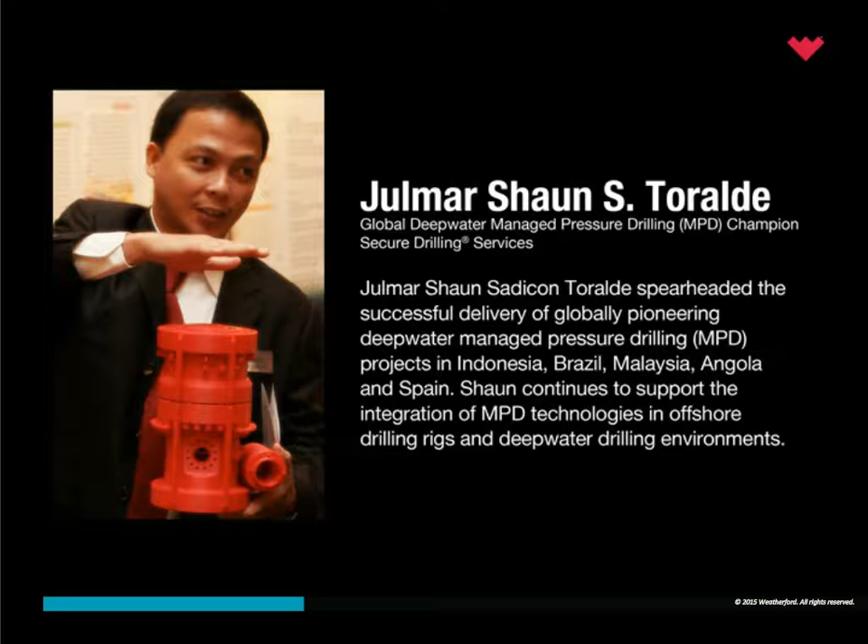I am Julmar Shaun S. Toralde, the Global Deepwater Managed Pressure Drilling Champion of Weatherford. I have been with MPD since 2005, and I have participated in the delivery of globally pioneering projects on MPD in Indonesia, Brazil, Malaysia, Angola, and Spain, and I am still actively supporting the integration of MPD technologies in offshore drilling rigs and deepwater drilling environments.

We are saying that offshore managed pressure drilling is proven, accepted, and expected because we have case histories that support the adoption of the technology in different environments, in different rig types, and across all the phases of the life of the well.

It is accepted because the operators and the rig contractors that have used the technology have realized that it makes the drilling process better, and they have continued using the same. In fact, most of the operators that have used MPD are expecting that the rigs they will be using will have MPD capabilities, and are even requiring the same.

As a technology, MPD is now entering the phase of mainstream adoption, and this is supported by improved regulation and permanent installations on the rigs themselves, even in deepwater ones. It is becoming the new drilling convention.

The adoption of MPD technology has not been immediate. It started in 2003 when the industry accepted the terminology of managed pressure drilling as a way of being able to drill wells that are difficult to drill. So essentially, as you can see in this graph, how can I drill this well, or drillability, was the main driver that made operators and rig contractors use managed pressure drilling methods.

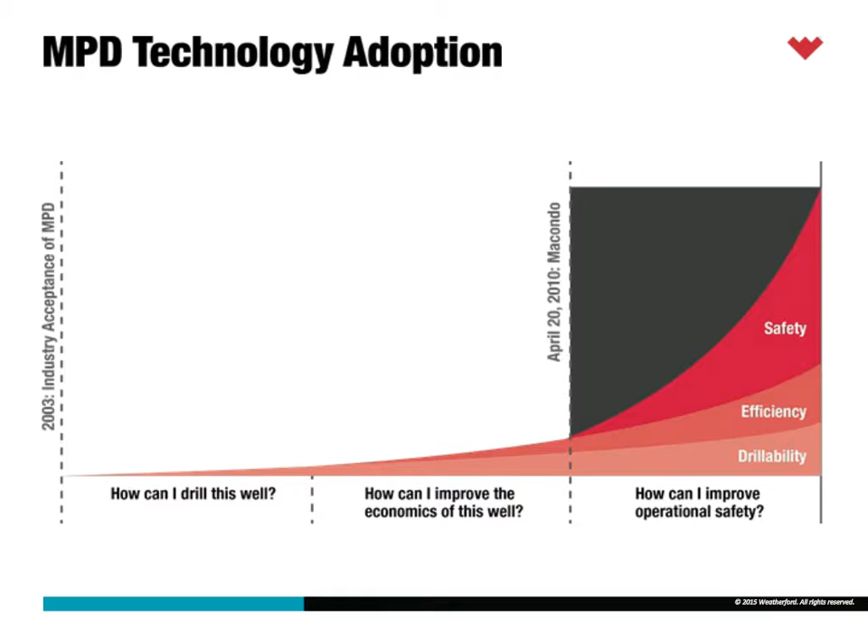But what is MPD, and how does it make problems disappear? The International Association of Drilling Contractors, or IADC, defines managed pressure drilling as an adaptive drilling process used to more precisely control the annular pressure profile throughout the wellbore. This means that with MPD, you have active control of the bottom hole pressure profile of the well, and you can change it quickly, immediately, efficiently, allowing you to react to problems and address events as quickly and efficiently as possible.

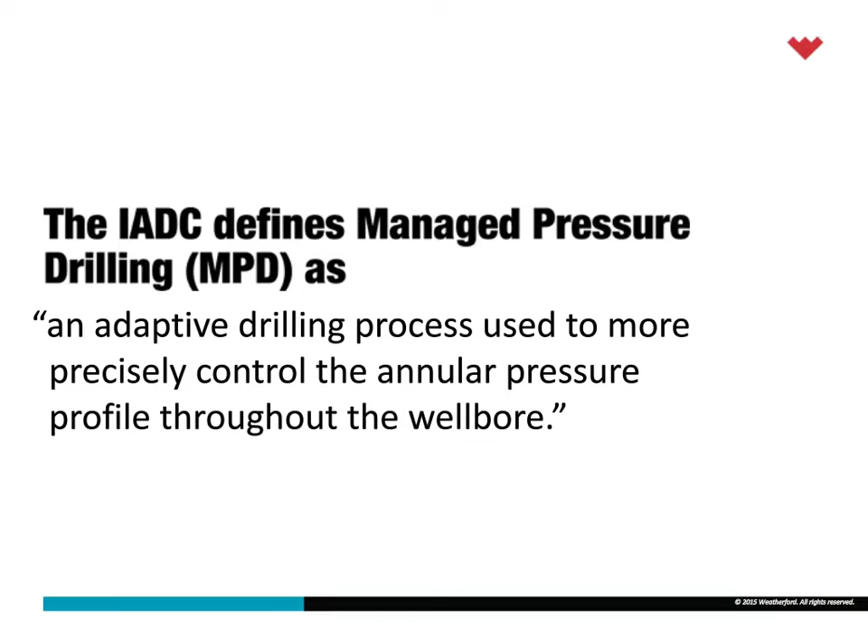The same definition says that it has two objectives: number one, to ascertain or know the downhole pressure environment limits, and number two, to be able to manage the annular hydraulic pressure profile accordingly. So MPD is not just about managing bottom hole pressure, it's also about knowing what are the limits of the geopressure environment and staying within those limits to drive safety, efficiency, and drillability in the process.

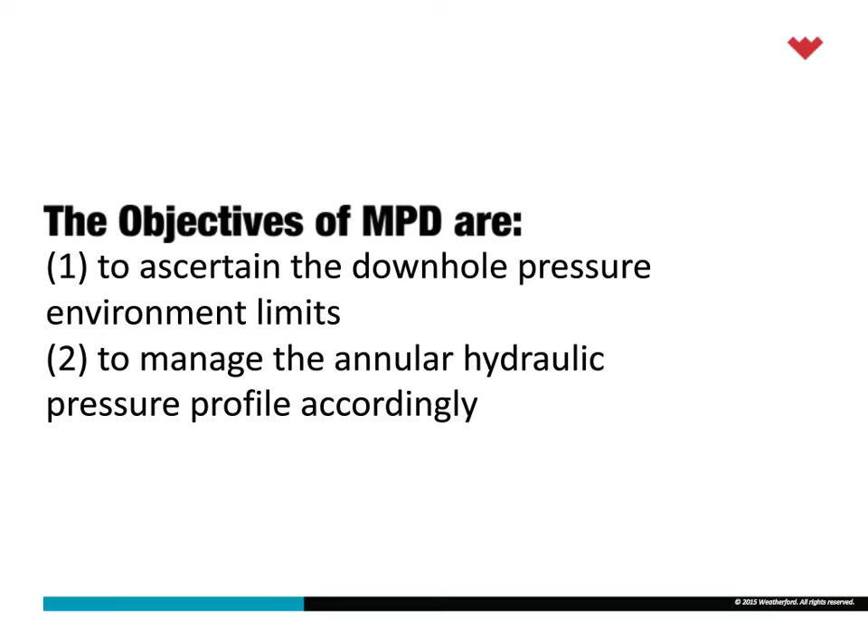What makes MPD different from conventional drilling? Well, essentially, it's a matter of what is open and what is closed. What can you do in these particular circumstances?

Conventional drilling essentially exists in an open-to-the-atmosphere system. The well is open to the atmosphere whenever drilling occurs. And bottom hole pressure, because it's open to the atmosphere, is only manipulated by the mud weight that is in the well, which provides pressure at the bottom of the well, and friction when the pumps are running.

Only those two factors. Managed pressure drilling changes that by making the system a closed and pressurizable system. Being able to do that allows you to make quick bottom hole pressure adjustments. If you look at the equation on the right, we are now able to add back pressure as a factor of what can influence bottom hole pressure. And back pressure, unlike mud weight, can be changed quickly and immediately, which means you are able to adjust to whatever events are encountered during the drilling process more quickly and dispose of the same.

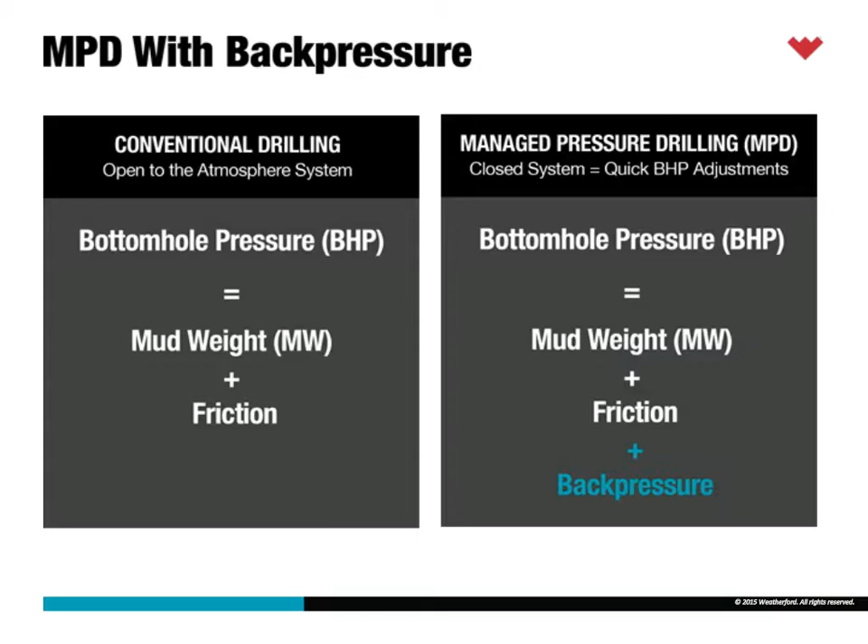Now, why do we need to be able to react quickly to downhole events? Well, we have this slide here which shows us that the ultimate objective is to be able to drill and maintain a stable wellbore, a Goldilocks phase if you might call it that - not too hot, not too cold, no influx, no kicks, just right, a stable wellbore. And that is what MPD gives us.

The graphic on the left side of this slide shows that if pressure on the well is too low, you risk having a major kick or blowout. Fluids will enter the well and come at you, or you are unable to maintain pressure on the well to keep it stable, and it will start to fall on you, causing you to get stuck.

On the extreme side, on the right side of this slide, you have hole ballooning whenever you're exerting too much pressure that the rock can no longer stand, and it starts to fracture. If you add more pressure to it, you will essentially be breaking the rock and causing circulation losses into the well, which, if left alone, will also produce a kick, giving you problems.

We realize that if we are able to detect these problems immediately, then we are able to address them quickly. But with conventional methods, that is not usually the case. MPD changes that and allows you to immediately react to all these changes if detected.

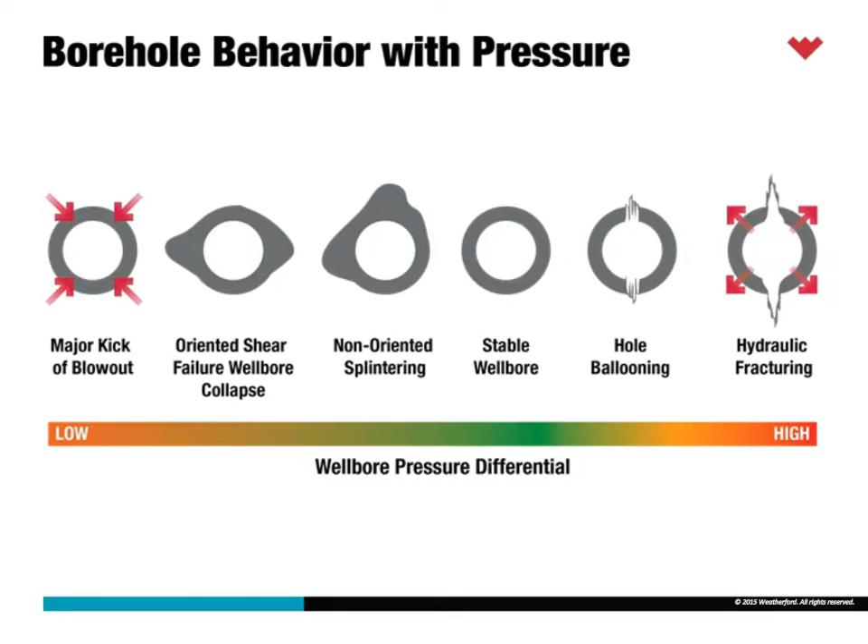Now, MPD can do all this, but how do we integrate it into conventional rig operations? So where is it located? In the offshore MPD system. This particular diagram shows you where the components are. The first major component, on the left side, is the rotating control device, or the RCD.

What it does is divert flow instead of going from the bottom of the well to the annulus and through the diverter. It's now diverted towards the next key component, the automated MPD manifold. All the flow of the well is diverted by the rotating control device towards this automated MPD manifold. The annulus is also sealed by the rotating control device.

I will show you a picture later on as to how it does this, as well as a picture of the automated MPD manifold. We monitor what happens with the well on the automated MPD manifold. It has a mass flow meter which detects the flow, the density, and the temperature coming out of the well.

We then compare this using software, using a program, and using an automated MPD control system, as to what is coming into the well — like what are we pumping into the well. We then compare those two values to see whether we're having a kick or an influx, and on the other side, whether we are already having losses.

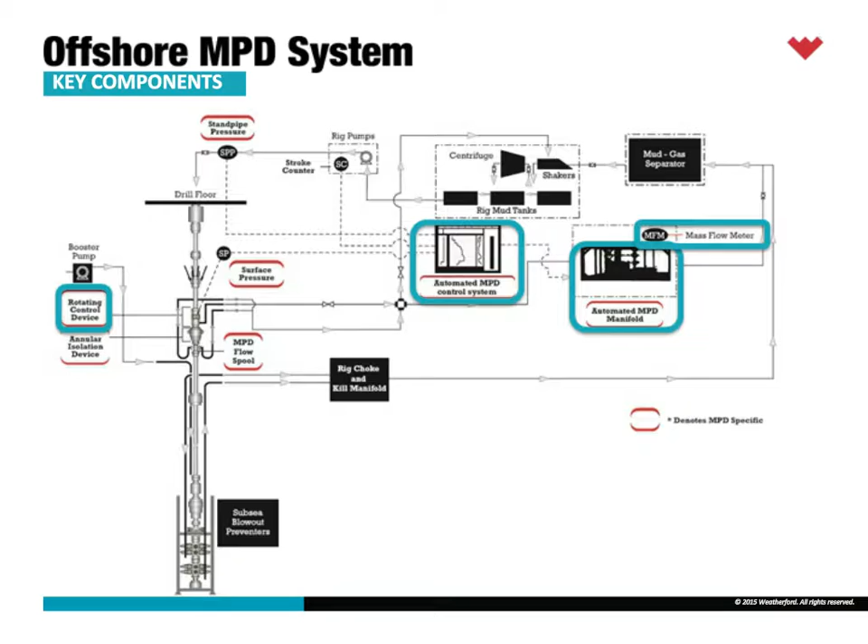Going back to the RCD, or rotating control device, we have a picture here on the left. It's composed of a bearing assembly, which is the one on top, and the RCD body, which is the one below. The RCD bearing assembly seals on the drill pipe, allowing us to close the annulus off when the bearing assembly is installed within the RCD body and retained by the same.

Doing that allows us to divert the annular flow of the well being drilled, and the RCD also serves as a barrier between the well and the rig floor at various amounts of pressure. All in all, the RCD allows us to drill with pressure on the well because there are bearings on the bearing assembly, allowing rotation while at the same time closing the well off so we can exert back pressure.

There is a standard, as we said, there is regulation with regards to managed pressure drilling already, and the one for the RCD is called API 16 RCD. With this standard, everybody can compare how much their rotating control device can take at whatever rotational speeds.

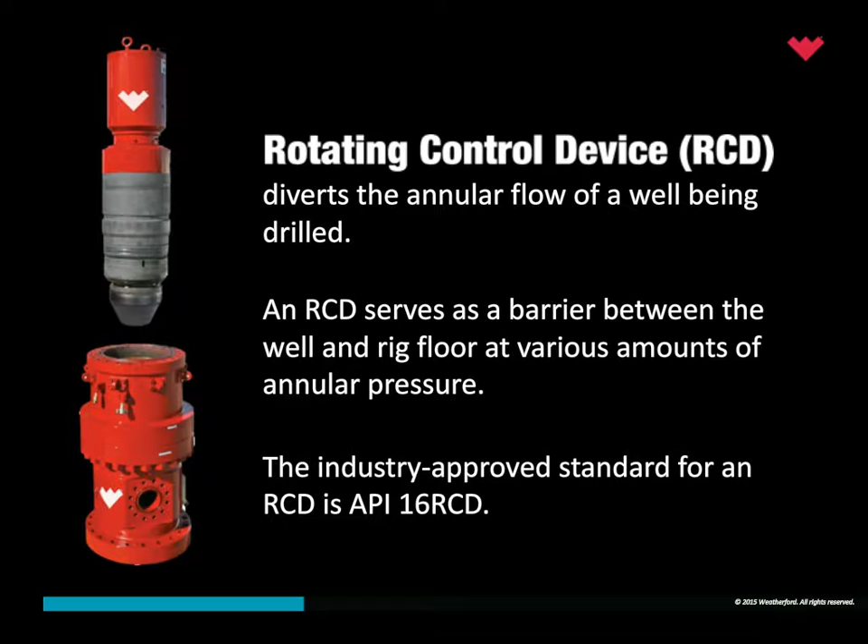The next slide showcases how the RCD works. For those who are strong on the visual learning side of things, this is our animation on the rotating control device.

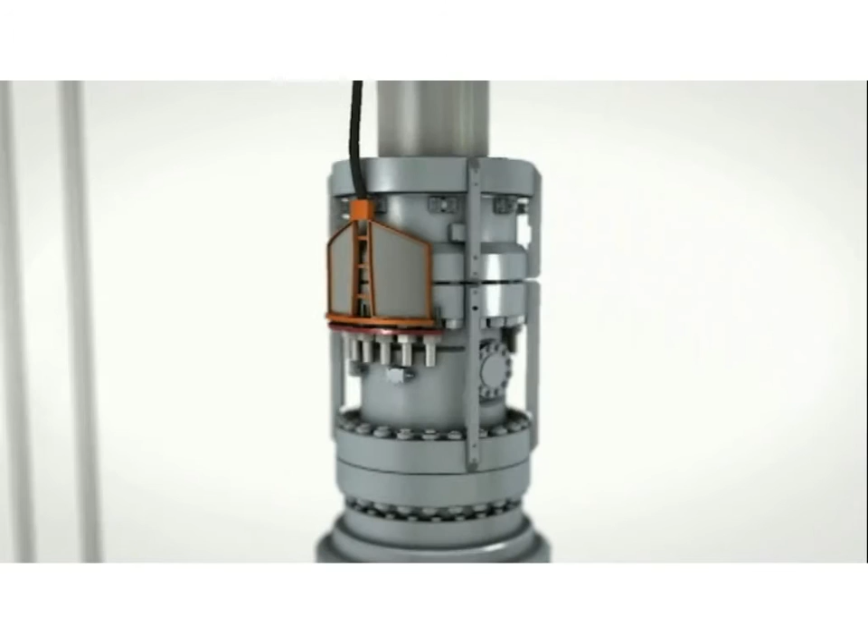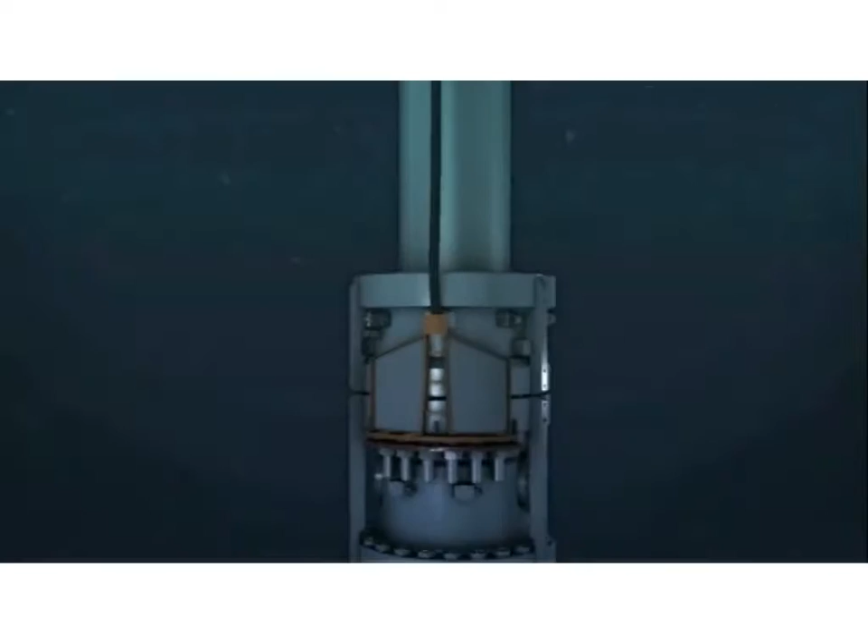It shows an RCD in the deep water scenario. We have hydraulic control of the same, and it's integrated into the riser system. This is a deep water setup, and essentially within that RCD you have the bearing assembly installed, and it rotates with the drill pipe with pressure on the well.

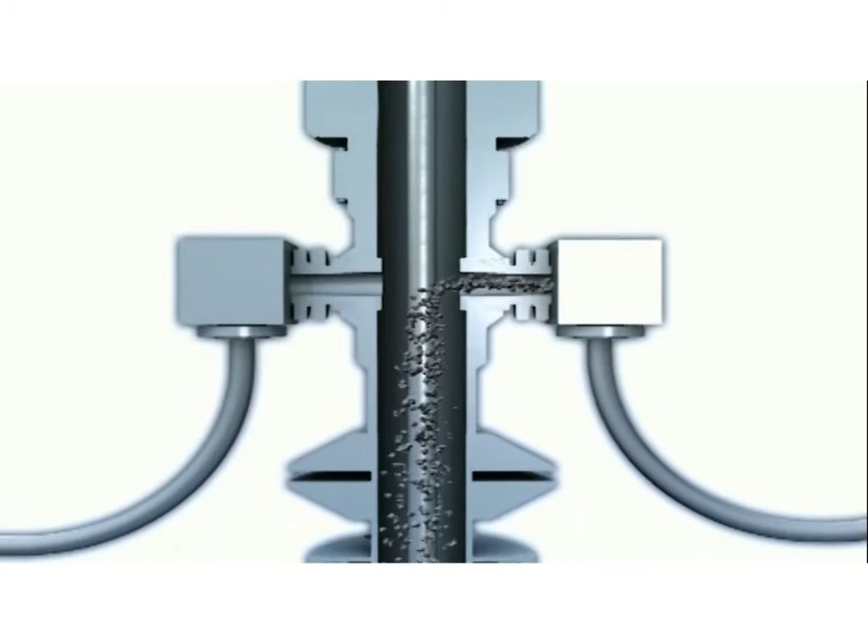All flow is diverted towards the MPD automated manifold so that we can detect and process what is going on with the well, and we can immediately react if there are any deviations from the norm.

Now that the RCD has handed off flow towards the automated MPD manifold, what do we do with it? We first have a detection skid where we have our instrumentation. We mentioned a Coriolis mass flow meter. The mass flow meter allows us to detect with precision as to what's going on with the well in terms of flow.

If there are deviations detected, we have the ability to manipulate the bottom hole pressure of the well using the chokes, which there are normally two, on the control manifold of the automated MPD system. What you don't see here is an intelligent control unit whose software processes all of this information and enables us to immediately warn the driller or operator if there is a kick or a loss, and at the same time, it can even automatically adjust to the event so that its impact is minimized and its consequence mitigated.

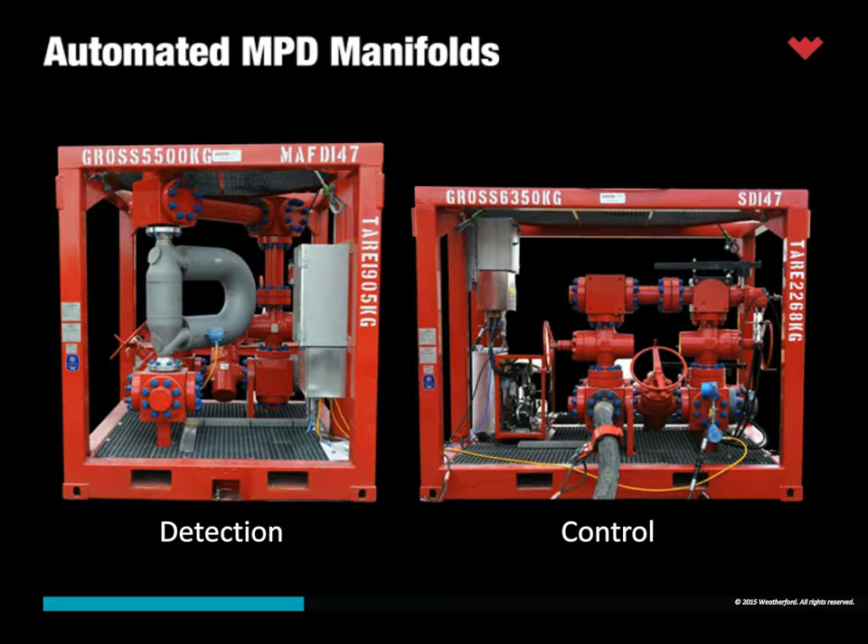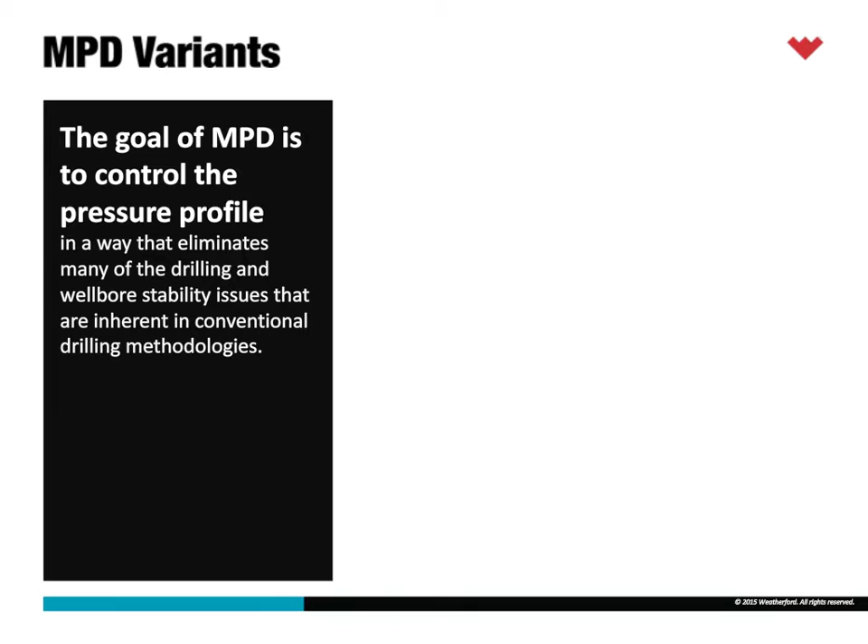Now, how do we practice MPD? MPD has a lot of variants, and I'm going to introduce you to at least 4 of the common ones. Just as a reminder, the goal of MPD is to control the pressure profile in a way that we eliminate many of the drilling and wellbore stability issues that are inherent in conventional technologies.

The first one is returns flow control, or the safety side of MPD. In this, we reduce the risk to personnel and environment by monitoring what is going on with the well and being able to react to them quickly.

The second one is pressurized mudcap drilling, or PMCD. This is a type of MPD we use when we are drilling in extreme loss situations so that we can drill ahead safely and efficiently.

Constant bottom hole pressure is more geared towards narrow mudweight windows, wherein you don't have severe circulation losses, but you have a need to be able to navigate narrow drilling geopressure environments because certain formations have characteristics that are not readily addressed by conventional methods. CBHP allows us to address the same.

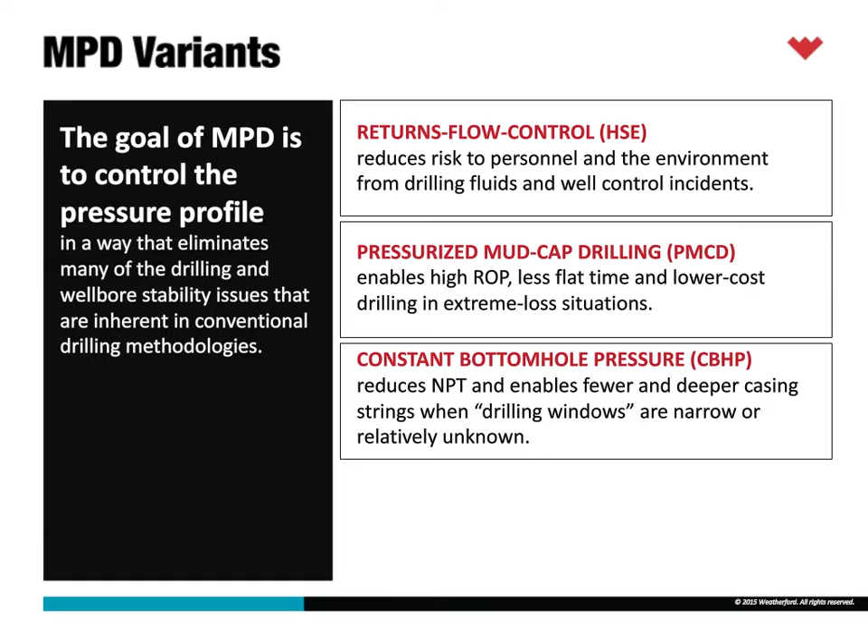And the fourth one is dual gradient drilling. All it essentially does is establish two or more gradients within the riser, because this is more geared towards deep water, allowing us to manipulate the bottom hole pressure with the same.

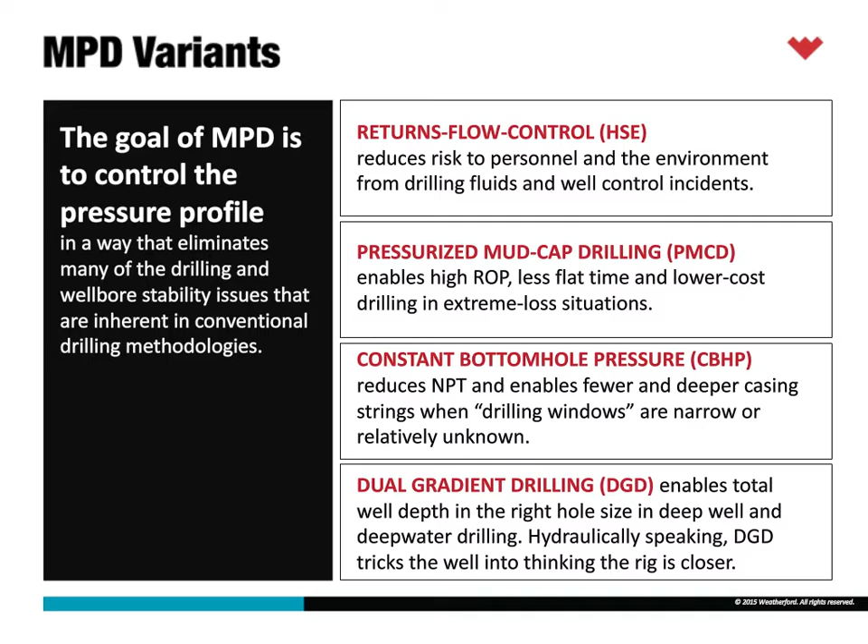Let's discuss returns flow control in detail. Essentially, as a review, with a rotating control device, we create a closed and pressurizable system, and all flow is diverted towards the automated MPD detection and control manifolds.

With our high-resolution mass flow meters, and by monitoring certain crucial parameters within the drilling environment, we are able to immediately detect and increase the sensitivity of the drilling monitoring system to kicks, losses, and other events. With the returns flow control mode of MPD, we are able to do advanced and early flow detection and even control. And from a deep water perspective, we are also able to address riser gas and mitigate against the same.

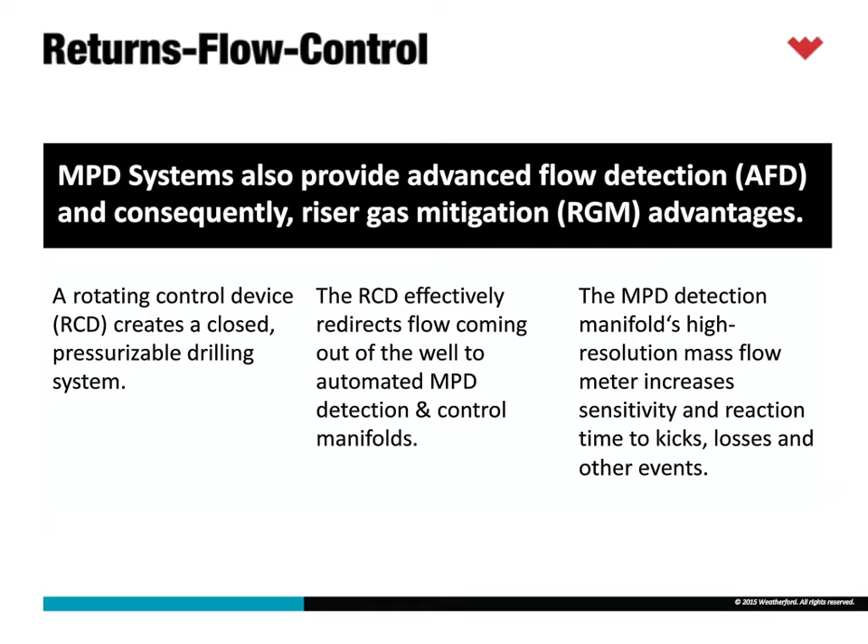Pressurized mudcap drilling is a variant of MPD that involves drilling without any returns to surface. Essentially, there is an annular fluid column which is underbalanced compared to the pressure that the well exerts, allowing us to maintain it in the annulus. And since it's underbalanced and the well is fully closed off with the RCD, there is positive pressure at surface.

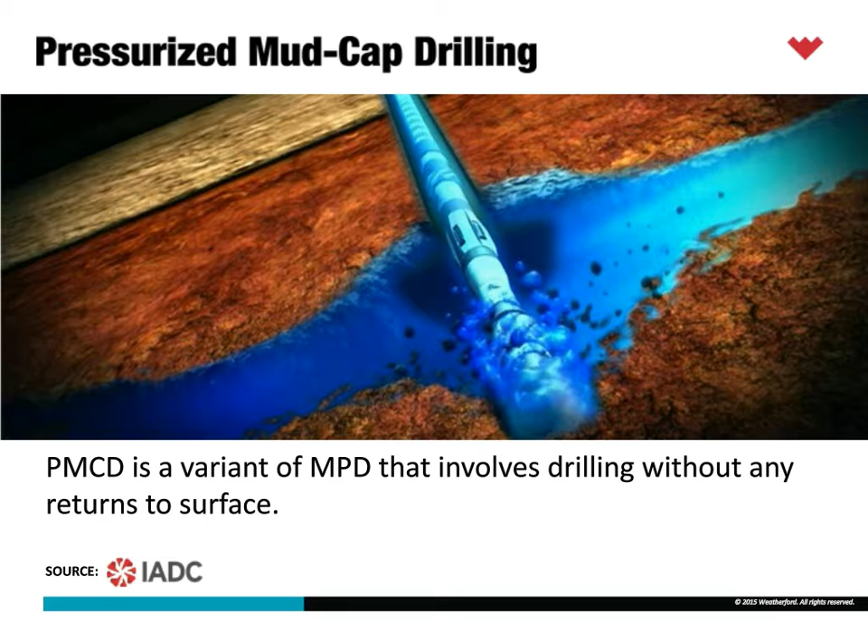And we use that pressure to be able to determine what is going on with the well. All the formation, if you go back to the previous slide, all the cuttings and all of the formation fluids are actually diverted into the formation where the losses have been found. And this is particularly possible if you are drilling through highly permeable formations.

So essentially, PMCD is what we use to be able to drill through severe circulation losses efficiently and safely, because we have monitoring capabilities despite of the same.

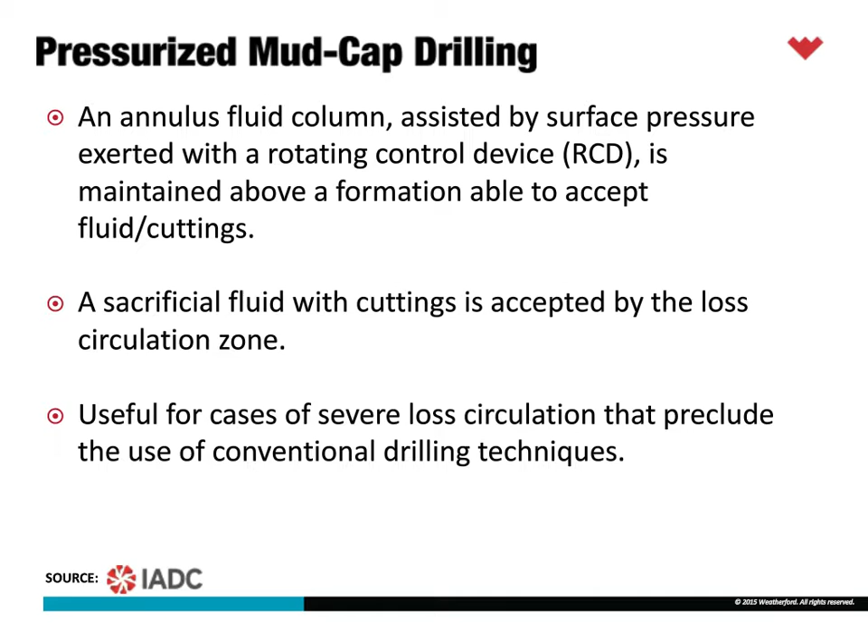The next one is constant bottom hole pressure, but before we proceed, I'd just like to reach out to those who already know about the basics of MPD, that we do have the main part of the presentation, which are the case histories coming up. So if you'd indulge us a bit further, we will continue with the basics, a few slides more, and then we'll move on to the case histories.

So going back, we do have constant bottom hole pressure as the third common type of MPD. Essentially, if you have a large drilling window, even if you're making connections, which are the dips in the graph that you see, you are within the drilling window, and you are not inviting kicks and losses as you drill, even when the pumps are turned off and the bottom hole pressure drops, because your friction disappears.

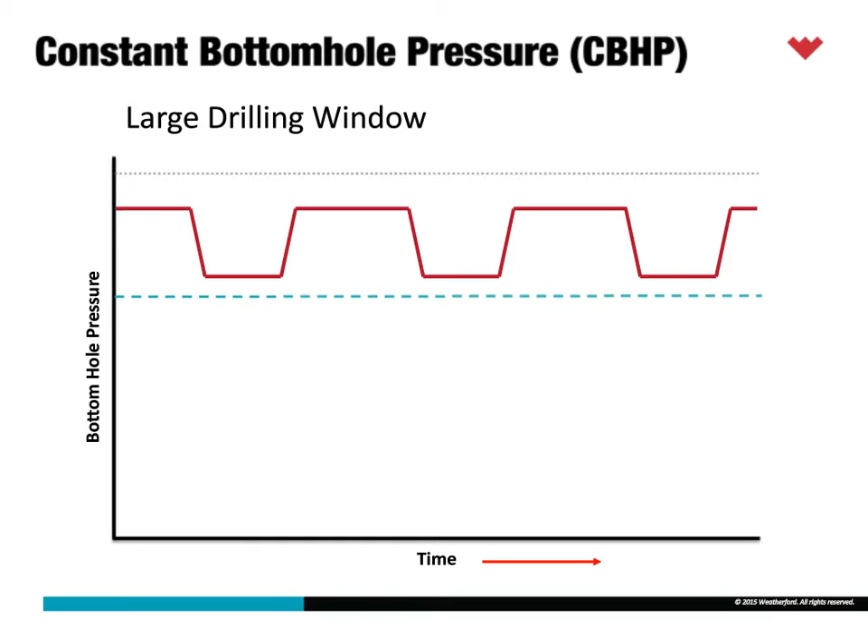However, if you have a narrow mudweight window, then essentially when you make a connection, you are below the pore pressure, which is the blue part of the line here. The blue dotted lines that are here present pore pressure. So if you are making a connection, you invite the possibility of a kick.

With constant bottom hole pressure, as you can see, it's more or less aligned, allowing you to stay within the narrow mudweight window. We do this by exerting back pressure to substitute for whatever friction is lost when making a connection, thereby allowing us to keep bottom hole pressure constant.

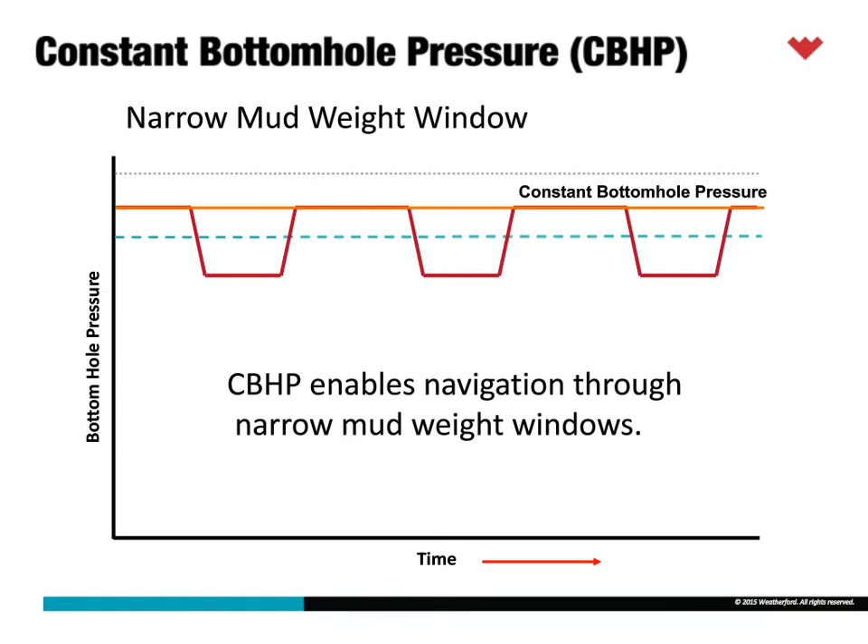And lastly, dual gradient drilling is essentially a means of separating the gradients of the fluid while you are drilling. And from a Weatherford standpoint, we are involved in the same with the provision of a subsea rotating control device, or the SRD, which allows diversion of fluids so that a dual gradient environment can be established. And that is the picture you see here.

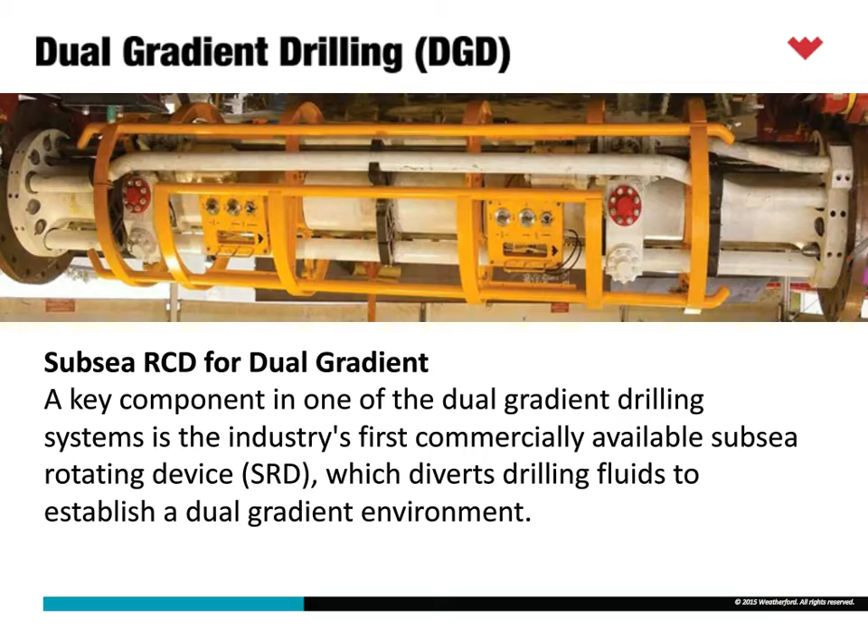We now discuss how MPD has been used across the life of the well. It might surprise some, but MPD is actually used whether it's exploration, appraisal, development, or intervention, because safety and efficiency do not choose any particular phase in the life of the well.

From an exploration standpoint, MPD was used in Indonesia for multiple deep water wells at a water depth of around 6,000 feet to manage geopressure environment uncertainties and associated risks in wildcat wells. The wells drilled had very little offset information on which to base the geopressure environment, so MPD was needed to immediately react to whatever the well would give the drilling operator. With MPD, you can rapidly and accurately apply and manage backpressure to determine the actual pressure profile of the wells, because with minimal offset data, you will not know what to expect.

But with MPD, you're able to adjust to whatever the well gives you, whether it's detection and control of kicks. In this case, we even had total losses in at least two of the wells, allowing drilling to proceed in a deep water environment despite severe circulation losses. Despite these losses, the well was even successfully logged and evaluated. So that is our case history for exploration.

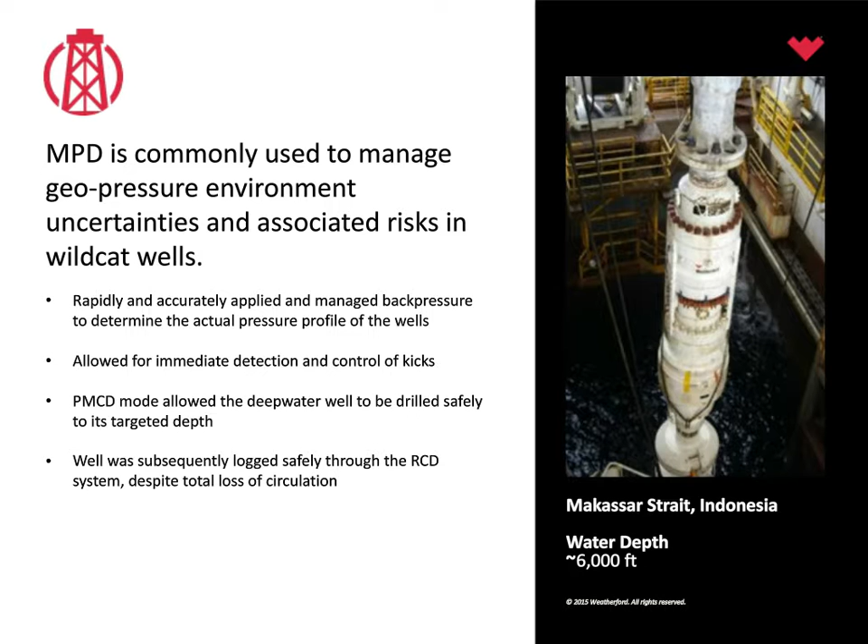There are a few more, and in the resource folder we will be providing, there will be a whole lot of other case histories in offshore MPD as to how it has helped in the exploration phase of drilling operations.

This next case history is from the southwest Gulf of Mexico, particularly when drilling through medium Cretaceous and lower tertiary formations. It was an appraisal well, and with MPD, they were able to drill successfully in areas that have challenged conventional drilling methods. Whenever TD is not reached, one of the technologies immediately considered for the next well is, of course, MPD. Using the constant bottom hole pressure variant of MPD, the well was drilled with no loss of circulation in a far shorter time frame than initially allotted.

Drilling time was reduced from 30 days to 5 days, a savings of 83%, and mud savings exceeded more than $1 million.

MPD engineering was applied to be able to continuously provide hydraulic stimulation, and it increased drilling efficiency by mitigating drilling hazards. So, from an appraisal standpoint, MPD gets you where you need to go in a fast and efficient manner.

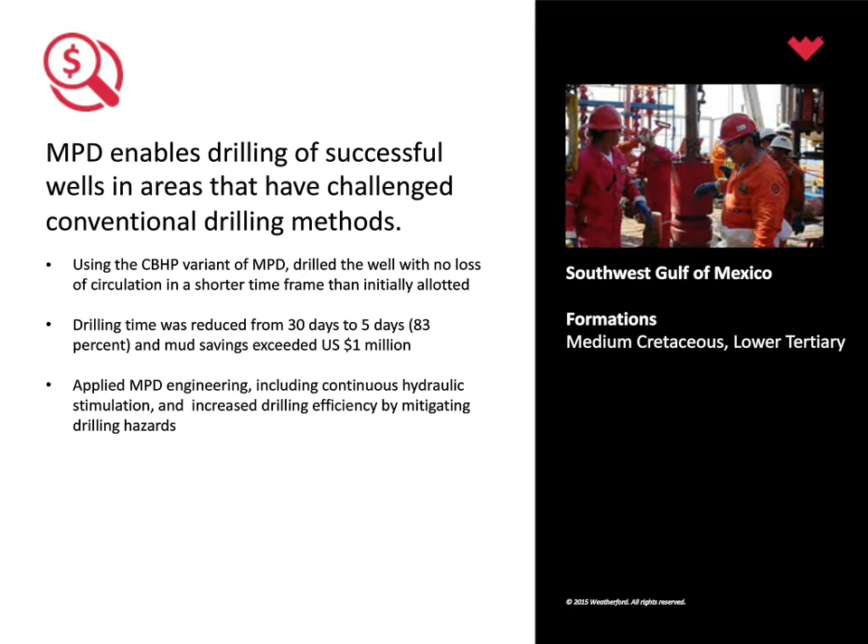We now go from the Gulf of Mexico to our friends in the Middle East. This is offshore Oman on deviated wells, through the Ilam, Laffan, Mishrif, Khatiyah, and Mauddud limestones.

In this particular instance, from a development and production standpoint, TD, or target depth, for 3 wells was reached by mitigating conventional drilling non-productive time issues such as lost circulation, differential sticking, and well control incidents. MPD is production friendly, and it equipped the operator to handle numerous contingencies. It also allowed them to use lighter mud weights and to determine precise formation pressure limits. Non-productive time was severely reduced, and the safety of the operation was top-notch.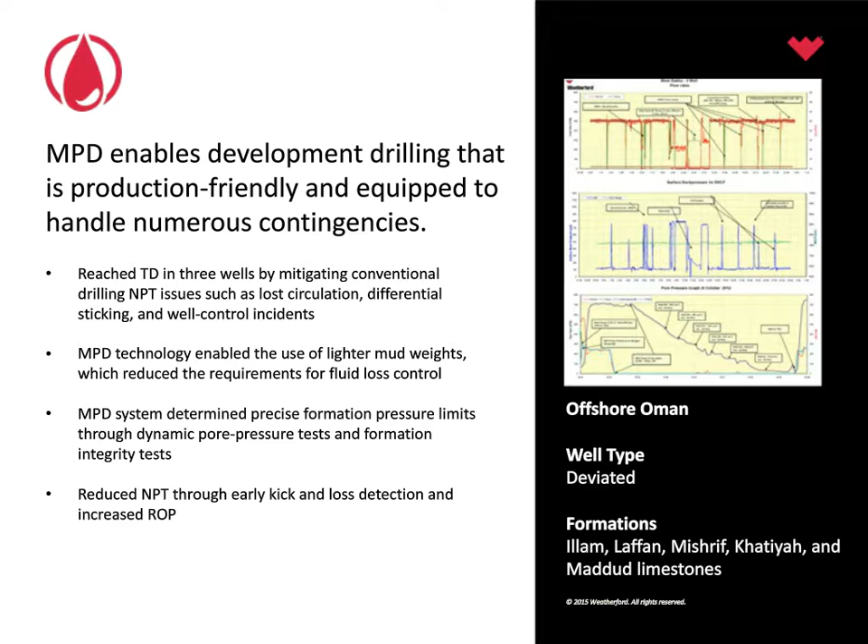The fourth one, on the intervention phase of the life of the well, addresses how MPD allows safe and efficient re-entry of abandoned wells with well integrity issues. In this case study, we were able to safely re-enter and properly abandon an offshore development well in shallow water because it was leaking from previous isolation methods deployed. MPD was used to cap the well and immediately detect an influx of gas during re-entry operations once the leaking isolation plugs were drilled out. Using MPD to enhance surface monitoring allowed for proper risk mitigation, and immediate action was taken to secure the well if and when required. That is how MPD was deployed from an intervention standpoint.

So whether it's exploration, appraisal, development, or intervention, MPD has its use and its niche to enhance safety, efficiency, and process safety from an overall standpoint.

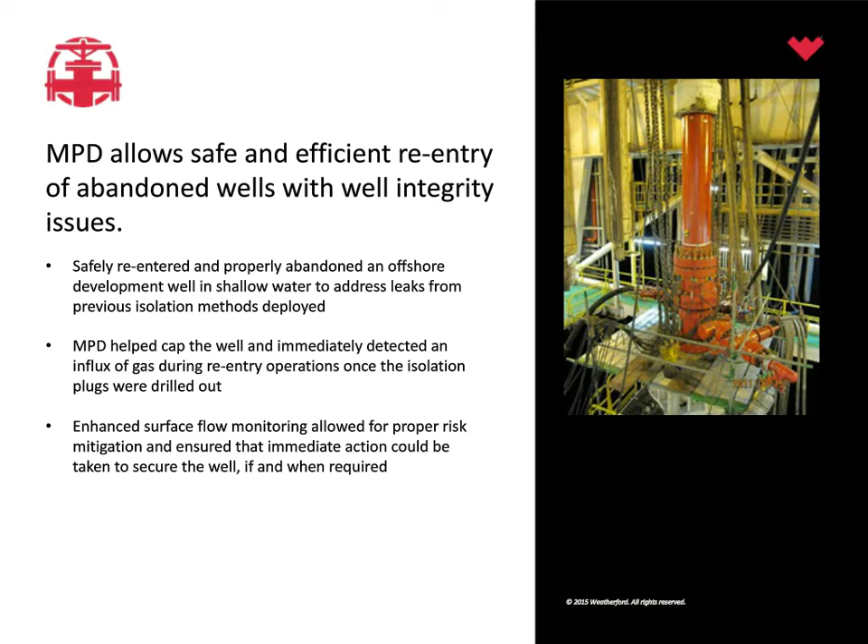MPD is also applicable across all types of geological complexities. All the easy wells are gone, and all the wells that are left are challenging wells, whether through carbonate, high pressure high temperature clastic wells, or subsalt formations wherein we do not essentially know what is underneath the salt. MPD is able to assist in drilling the same.

This is a case study in Angola, drilling through carbonate formations, where MPD was used to address severe circulation losses to provide multiple efficiency and safety benefits over conventional methods. In this case, it was used to drill an oil well with 1 to 2% H2S on the Middle Pinda highly fractured formation. Losses of as much as 720 barrels per hour were encountered, and MPD was initiated, allowing drilling to immediately continue until target depth was reached. Downtime was minimized because MPD allowed for the immediate transition to drilling instead of mitigating or addressing severe circulation losses.

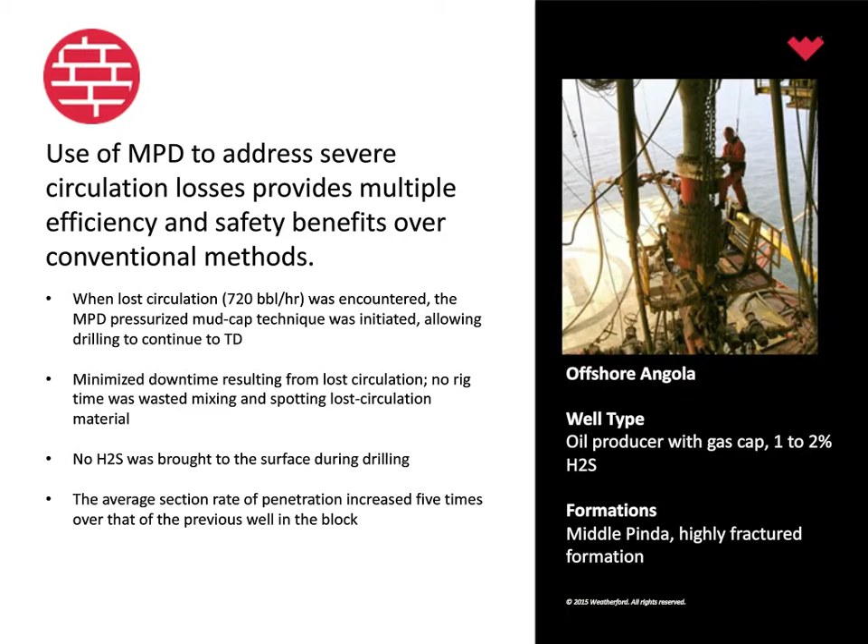In clastic formations, it's not about severe losses, it's more about narrow mud weight windows and early kick detection or advanced flow detection, especially when dealing with high pressure, high temperature wells. In this instance, with our friends in Norway, for an offshore exploratory HPHT well, production hole size was 8.5 inches, and total depth reached was more than 5,900 meters.

Section TD was reached within a narrow 0.4 ppg drilling window under extreme pressure and temperature conditions. An overbalanced wellbore was maintained, and ballooning and breathing events were immediately diagnosed and controlled by evaluating pore pressure and detecting kicks. 10 days of rig time was saved, a savings of as much as $7.5 million, not to mention the benefits in reducing risk and enhancing safety. Gas influxes were controlled, and weighting up of the mud was done precisely and quickly, allowing savings over the use of conventional drilling methods.

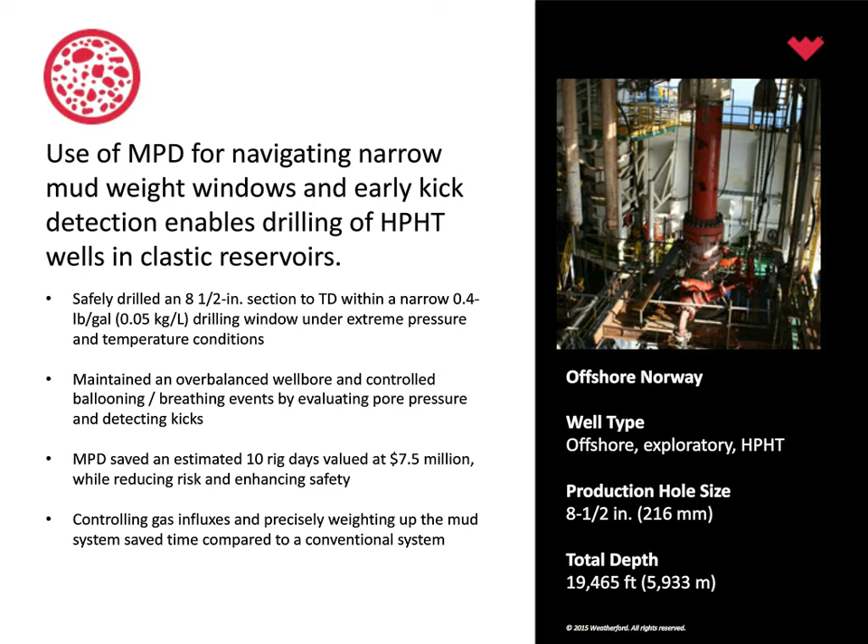Lastly, MPD is a proven and tested solution in subsalt or pre-salt formations. In this case study, from our friends in Brazil, Bom Dia, in the Santos Basin, on a deep water vertical well that had already been abandoned with massive fluid losses while it was drilled. MPD allowed for entry of the well, and through the plugs and abandonment devices already installed, once re-entered, the operator encountered a severe fluid loss zone that consumed 600 barrels an hour. That's why it was plugged and abandoned.

MPD was used to re-enter, and once total loss of circulation was experienced, the switch to pressurized mudcap drilling was made, and the targeted production zone was reached. Completion was run, and essentially the well is now producing a whole lot of oil for our friends in Brazil.

So whether it's carbonate, clastic, or pre-salt, subsalt formations, MPD is an accepted, proven, and expected way of drilling geological complexities.

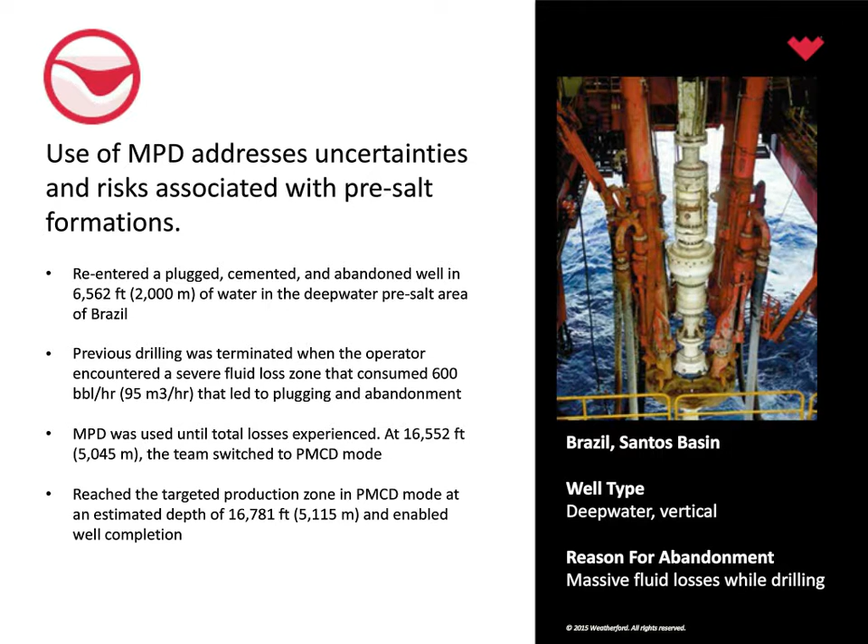We have discussed all the rig types, whether it's land, jack-up, semi-submersibles, or drill ships, that MPD has already been deployed on all of them.

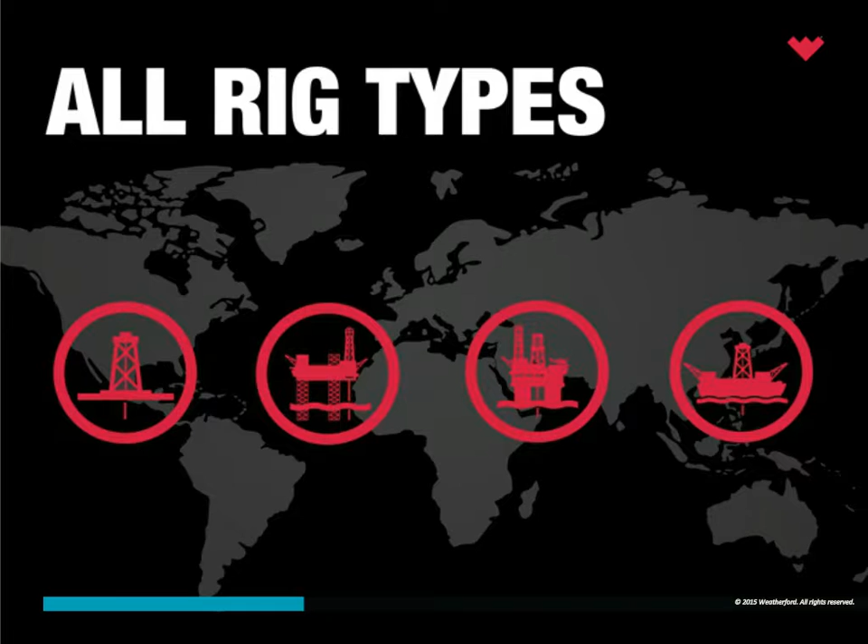MPD is also applicable on all the phases of the life of the well, whether it is exploration, appraisal, development, or intervention. And it has proven that the benefits outweigh the costs for this technology to be used in all these stages.

And it applies to all applications, particularly to challenging geological environments, whether it's severe losses in carbonate formations, high pressure, high temperature clastic reservoirs, or through subsalt formations, to be able to address risks and uncertainties. MPD is a technology that is reliable in all these instances.

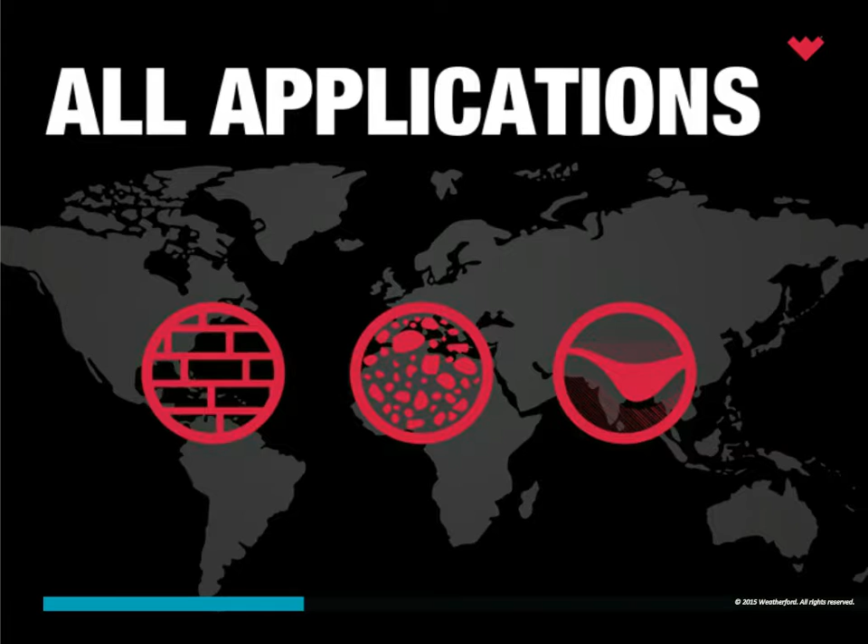It has now been deployed in all the regions of the world, as you can see from the geographical and geological diversity showcased in the case histories, of which, because we have limited time in this webcast, we were only able to discuss at least 7. There are more in the case history folder provided as a supplement to this webcast, where you will see the depth, the expanse, and the range of MPD operations around the world, whether it be land or offshore, which is the focus of this particular presentation.

MPD is proven, accepted, expected.